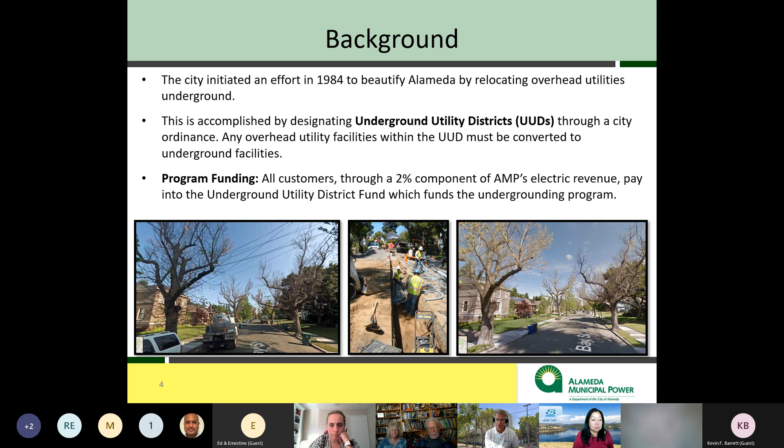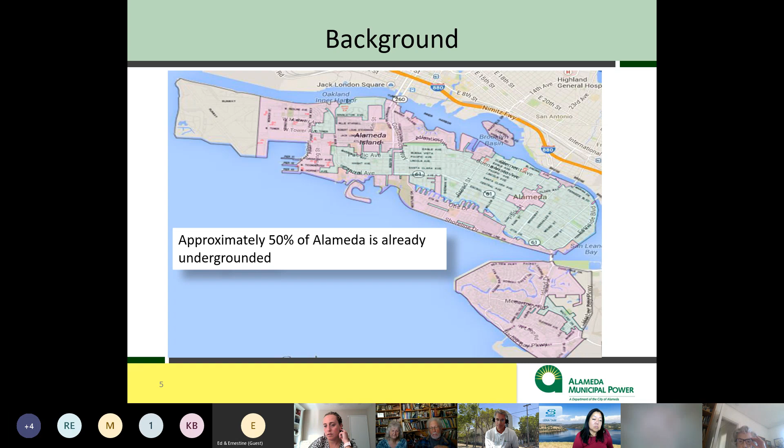25 underground utility districts have been completed in Alameda since 1984. Approximately 50% of Alameda is already underground, but we still have 85 miles of overhead. The original undergrounding program was halted in 2012 and AMP was tasked with redesigning the process.

A revised underground utility district policy was approved by the City Council in March of 2015. Major changes in this new revised program include that the criteria for selecting and prioritizing districts was defined and quantified. A district nomination board, which includes 1 member from Public Works and up to 4 members from the general public, was created to nominate districts for approval. And the cost of the service lateral and conversion costs are no longer passed on to property owners unless the length of that lateral exceeds 100 feet, which is rare. In that case, there may be some costs passed to the property owner.

The City Council approved the Otis Broadway Underground Utility District, or UUD number 38, in February of 2019. The district runs along Otis Drive from High Street to Broadway and along Broadway from La Jolla to Encinal Avenue. It's about 1.2 miles long and impacts 205 parcels. Alameda Municipal Power is the lead agency for the city's undergrounding program. The joint trench participants include Alameda Power, AT&T, Comcast, and the city.

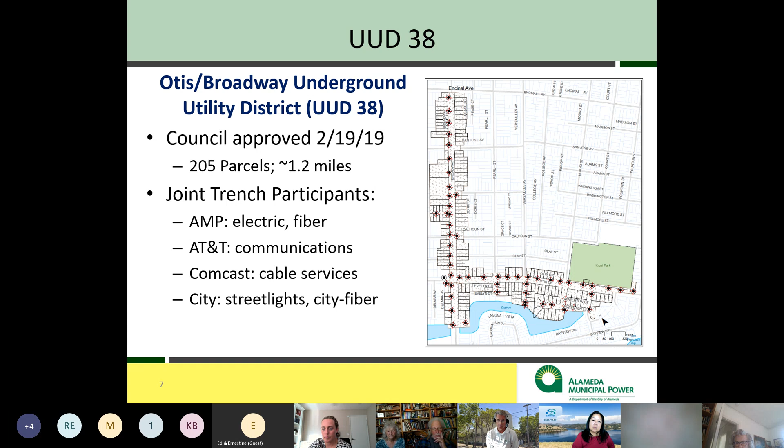Here's an overview of the undergrounding process. The main trench substructure and service lateral conduits are built by a construction contractor who will also install and convert the streetlights. After the substructure is in place, each utility will install their own wires, cables, and other equipment, and will begin to convert customer service connections from overhead to underground. When all the utilities have completed their conversions, the utility poles will be removed.

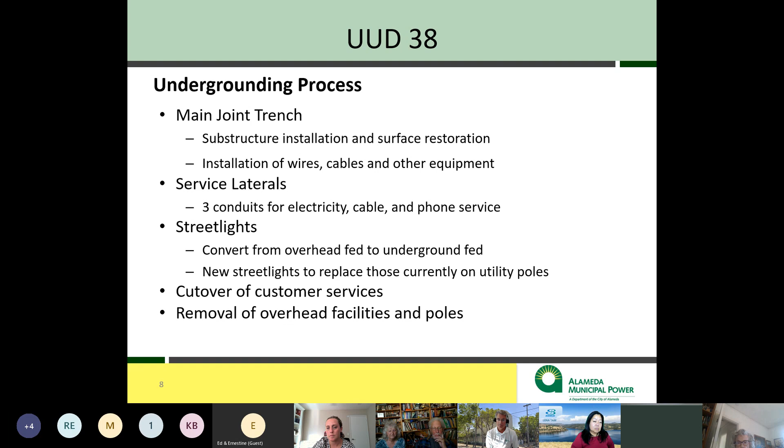The main trench will be located in the sidewalk area. Of note is that the contractor will take precautions when working near any street trees. That means they cannot simply saw cut a trench in the sidewalk. To protect trees, they will need to excavate underneath the tree roots, and the contractor is required to hire and retain their own arborists during the trenching operations. In the map on the left, all those circles represent an estimated critical root zone of each of the trees.

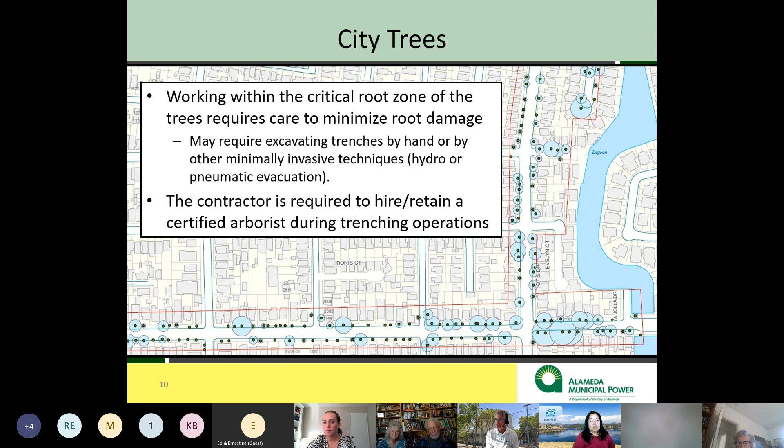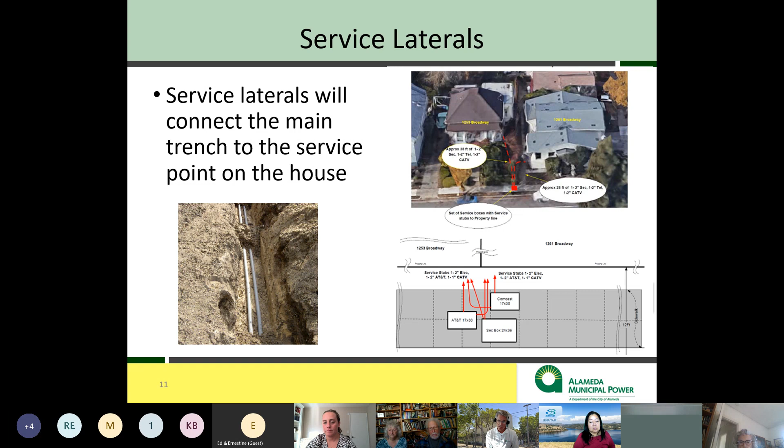Service laterals will connect the main trench to the service point on your house. The service lateral involves trenching from back of the sidewalk to the resident to install 3 conduits for electricity, cable, and phone service. The lateral typically follows the shortest path to the existing electric meter on the house, trying to avoid driveways, trees, and other structures. AMP's contractor will restore the surface as close as possible to existing conditions.

The property owners must grant permission for this work to be done on their property. The permission will be granted via a permit to enter document that AMP will provide to the property owners for their approval.

For service conversions, your service will be converted from being fed from overhead to underground. There are multiple methods that can be used to convert your service, and it depends on your specific arrangement on your residence which method is used.

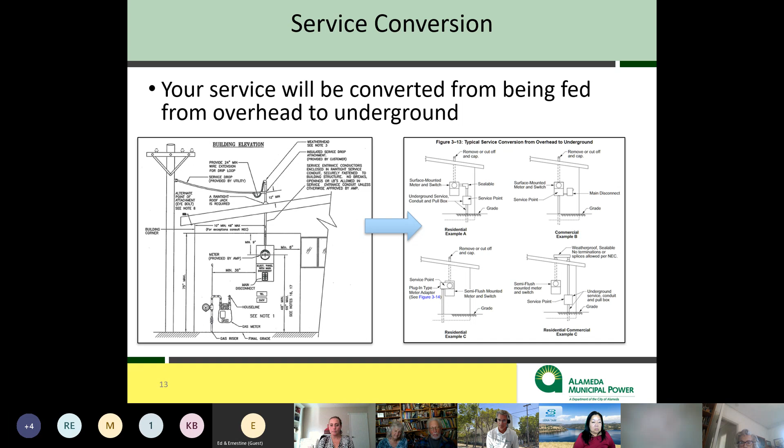We just learned that we need to provide additional documents in our permit application, and we're not sure exactly how long that's going to take.

Once construction starts, we estimate it'll take 10 to 12 months to install the underground substructure. After this construction is complete, each utility can begin to pull their cable and install equipment. Service cutover will likely occur in 2024, with the poles being removed in 2025.

During construction, residents can expect work to proceed one section at a time, so any trenching activity in front of a particular residence should last only a few days.

You will likely experience in the area sidewalk closures, driveway closures, although the contractor will coordinate with the property owner if they have to close the driveway. Street parking may not be available in the construction zone. There may be lane restrictions and scheduled brief outages during the service conversions.

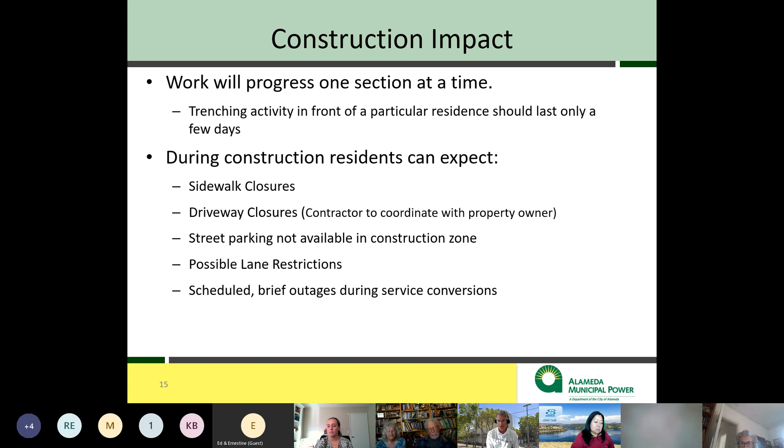Residents will be notified via door hanger before any work is done on their property.

Project updates and schedule will be posted on AMP's webpage and emailed to those who opt in to the project mailing list. To sign up for the mailing list, which is an email list, there's a link on the website, or you can use the QR code.

So what are our next steps? We will continue to work with Caltrans to obtain an approved Caltrans permit. We'll award a construction contract, and then, prior to any work being done on private property, we'll obtain a permit to enter from the property owner for the service lateral work and service conversions.

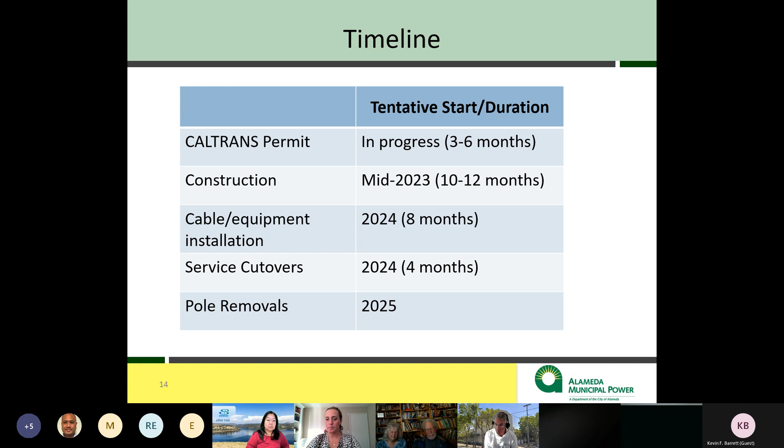Okay, I appreciate everyone coming out tonight, and I will try to keep everyone up to date. Like I said, we don't have a whole lot of specific information on start date and when your street is impacted, but that will come. Once again, you're welcome to get email updates - you can scan the QR code, or follow that link, which just adds your email address to a list that I'm keeping, and I will send whatever updates I have to that.

Oh, Ed, do you have another question? Just a comment - I wanted you to know that regarding that email list, I tried it, but since I didn't get this page as a hot link on the computer, I tried to type it in and it didn't work, but the QR code did work to get us on the email list. I don't know why, but these were sent out, I have a paper copy, and I could see it's a hot link because it's blue, but what I typed wouldn't work. Somebody might look into that because we want to get the emails and know what's going on.